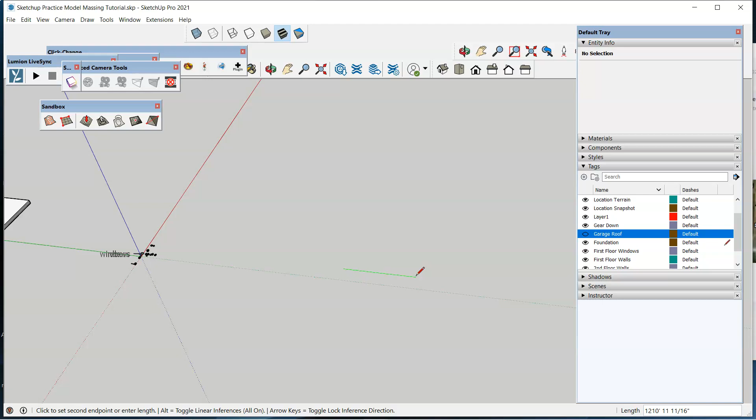So let me go ahead and introduce the commands for SketchUp. The letter L draws a line, and you'll notice that the lines change different colors. Look at the axes right here. The green and red lines are basically like the Cartesian coordinates, your X and Y axis, and your blue lines are your Z axis - they represent your three-dimensional axis.

So right now I'm drawing the two-dimensional geometry. I pressed the letter L, clicked anywhere, and it dropped an anchor of a line, and I want to make sure that I draw straight lines, and I want them perpendicular. So I want to make sure that I see green or red, and when I see green, I know I can draw a perpendicular line from it on the red axis.

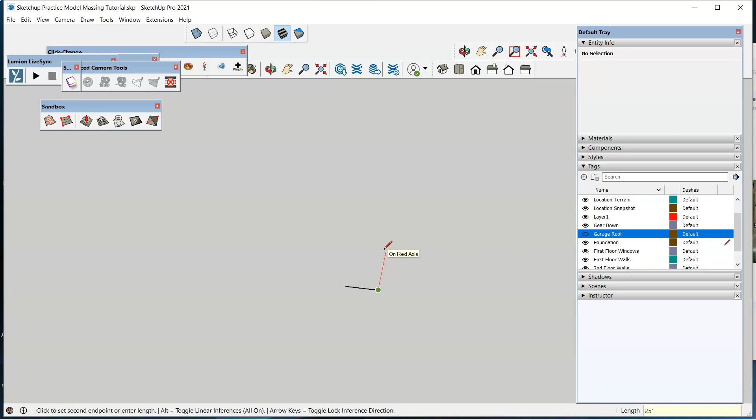So I'm going to go ahead and type in 25 feet, and again on the red axis 25 feet. Now we're looking at this from a perspective, so it's not going to look straight, but it is.

Now you'll notice that there's these little dots - SketchUp's trying to help you draft. If you hit the space bar, you get out of that command. Notice how when I closed the geometry, this solid piece came through, and that means it's ready for three-dimensional extrusion.

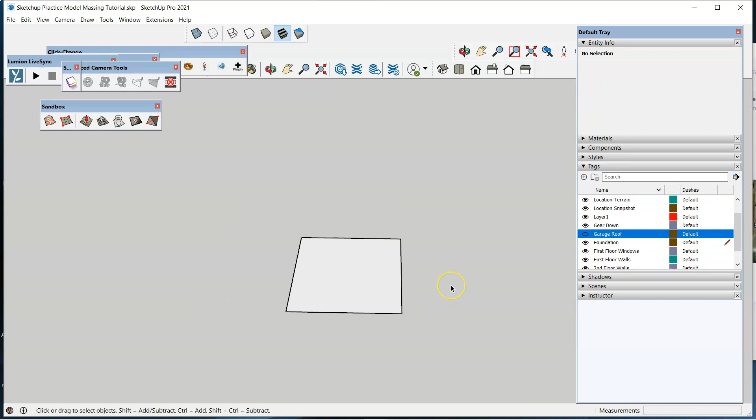So what I can do is hit the letter P, and this is the push-pull command for three-dimensional extrusion. I can type the distance however high I want, and I'm just going to do 9 feet. I literally typed in the distance 9 feet.

I also typed in the distance from the line command, 25, and I used that little symbol - the apostrophe. There we go. The apostrophe denotes feet, and the quotation symbol is inches. That's pretty standard in a lot of CAD programs, computer-aided design programs.

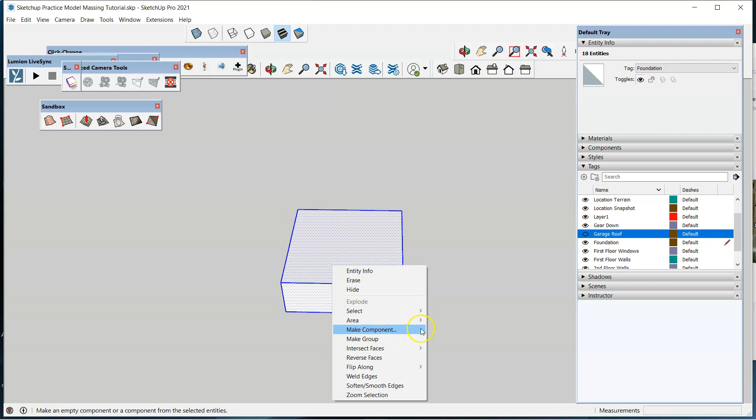Okay, so this is a massing of the actual garage - this is what's existing. There's also supposed to be a roof on it, but we're adding a second story. In SketchUp, you are able to manipulate this, but I don't want to because it's a massing, and I want to put something on top of it and play with it while not disturbing the original geometry of the first floor.

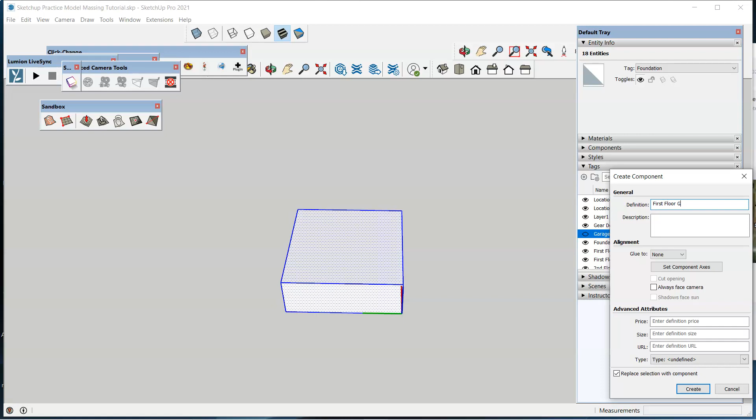So I want to make this a component. Hit the space bar, left click and drag, and you'll be able to select all of this geometry, right click and select make a component, and just call this first floor garage, then hit create. Notice how it selects all the lines.

Now I can explode this and undo it, and now it selects everything individually. So I'm going to go ahead and undo what I just did - undo is Control Z, Command Z for Mac. This is basically like a force field around it, so I can't really mess with it.

But I can manipulate it if I double click on it. Notice how this force field around it is highlighted in this dashed box, but now it's all individual lines.

Anyway, so that's components. Now for this massing project, what I would like for students to do is go ahead and take the dimensions 25 by 25.

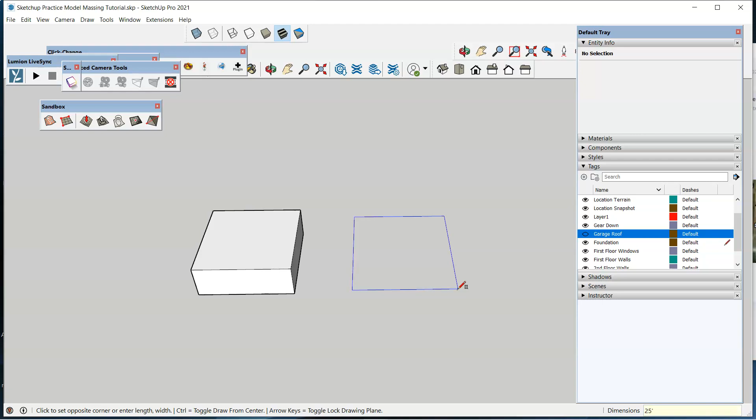You can type in R for the rectangle tool. Let me back up. R is the letter for the rectangle tool, then you select this point and another point for a rectangle. Let me show you over here. I left click here, then left click over here. I can type in 25 apostrophe, comma, 25 apostrophe, enter, and it'll make a rectangle with that.

So what I want you to do with this massing is come up with basically how you want it shaped, but I want 3 different iterations.

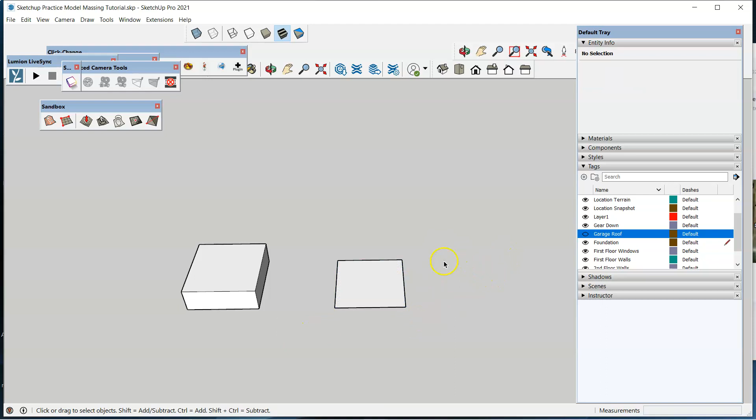I'm going to go ahead and move this. How you move is select all - hit the space bar to get out of every command, then select by left clicking and dragging the box over, hit the letter M, and then you can move.

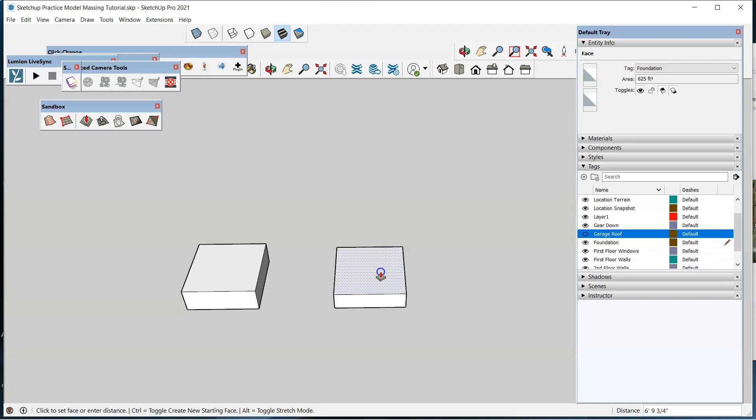The ideal way to create a massing is push-pull. Since this is a second story, you can do this 9 feet or 10 feet - it really depends on what you want on the inside. I want 9 feet on the inside, so I'm going to do 9 feet.

But look what else you can do. I can draw a line, let's just say, to this. Notice how it snaps to these various points and calls it out - midpoint. That's the very middle of that particular line. I can draw a line from midpoint to midpoint.

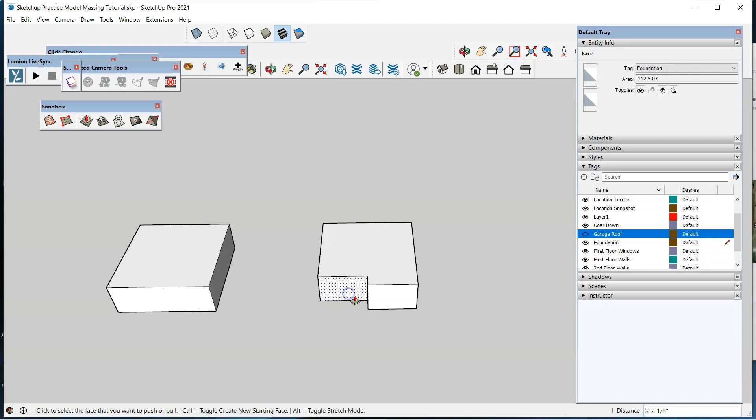I can also use the push-pull tool and make this more interesting. I could also choose a random, arbitrary shape - maybe this could be a balcony, maybe this could be another balcony.

What I don't want is this shape to repeat. So you can really play with a lot of things - maybe this is the office here, and...

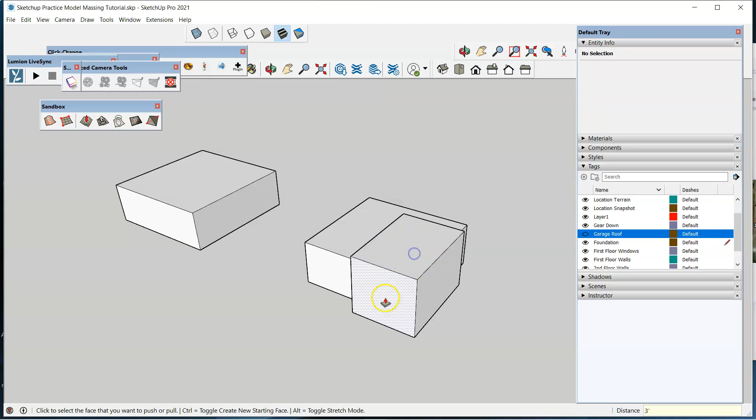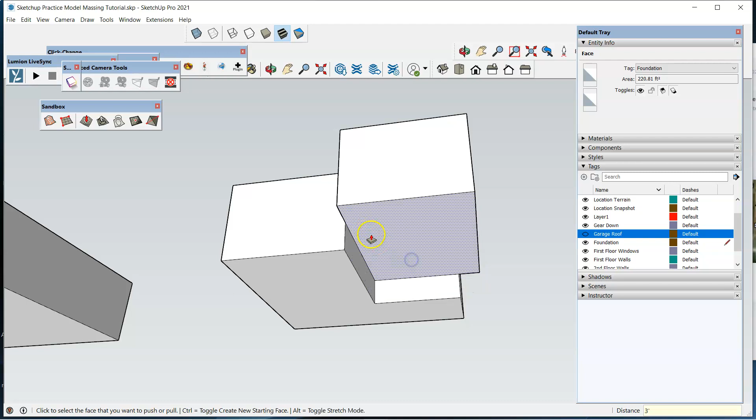Maybe this goes up another 3 feet. I typed in 36 for 3 feet. And maybe on the inside it also goes up 3 feet, and that way you step up into this separate space.

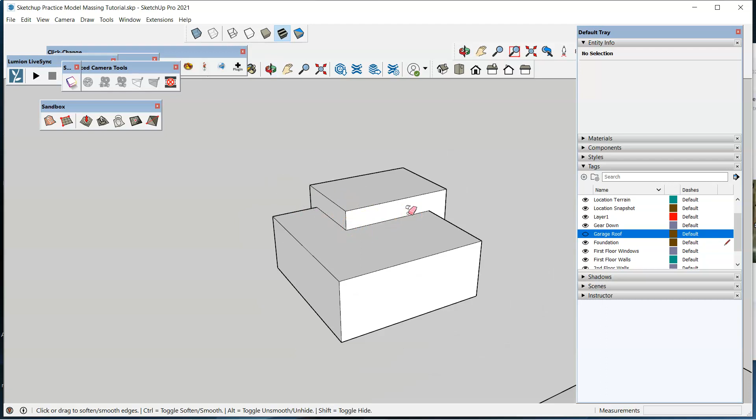But this space is empty, so I don't know if I like that idea, but you get the idea - you're creating these masses to get a feel for it. I'm using the erase tool, the letter E for erase, and I can just select lines I want to erase. I don't know if I like that idea, so I'm just going to Control Z.

But maybe I like this - create this whole kind of separate vibe from this area. Maybe this area is a lobby. Maybe this area is, I don't know, a little kitchenette.

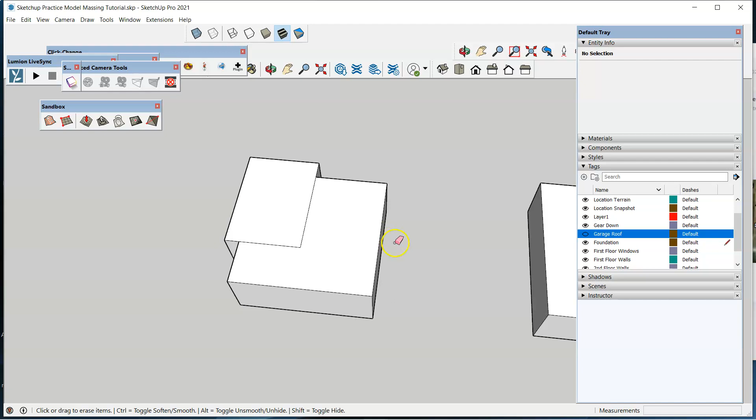Or maybe this area is a kitchenette, this area is a lobby, and this area is for clients to discuss their projects, and then this right here is for maybe a TV screen to project their project. But play with it, definitely play with it.

I would actually do this - I would do the rectangle before I would start doing the push-pull tool. I would make the rectangle, and then I would make copies.

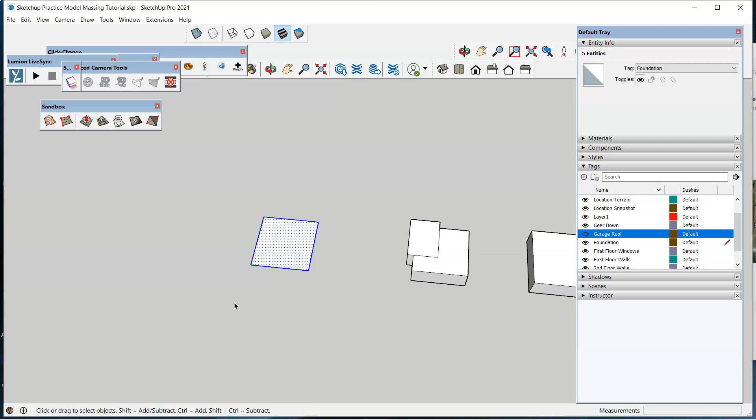So I would hit the space bar, select, move, hit Control, and then click right there, type in 5x, and it makes copies. That way you can just fiddle around with all different types of iterations of this design. So this could be 1, and once you're done with 1, make it a component.

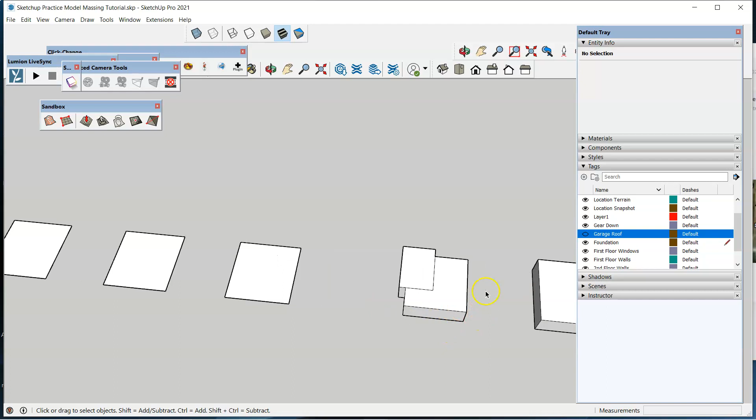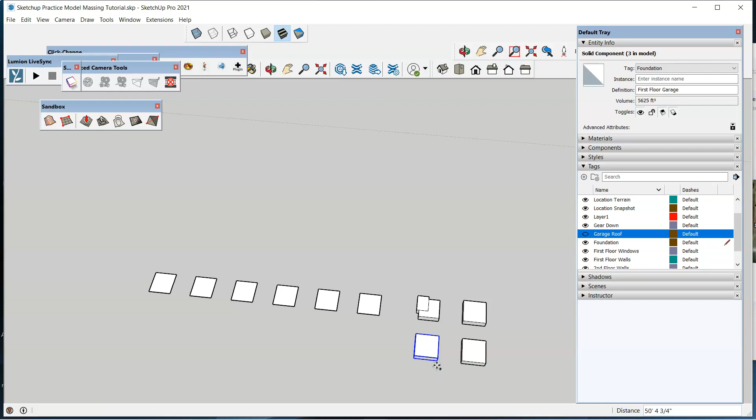And that could just be massing 1. If you want, what I would recommend is copy this too - hit the space bar, move, Control, M for the letter move, hit Control. Then I would do that again and click right here, let's just hit 6x. There we go.

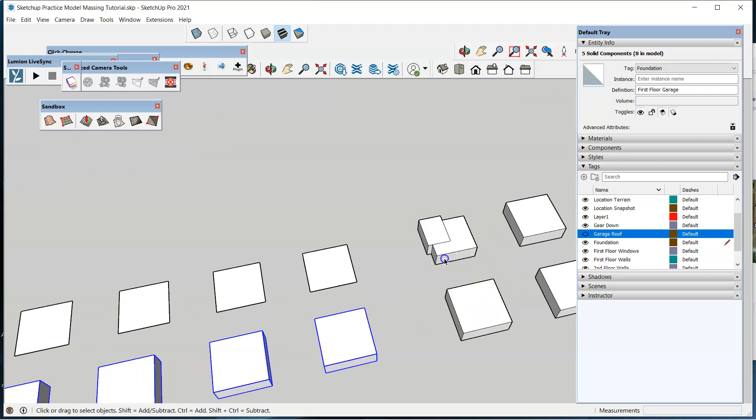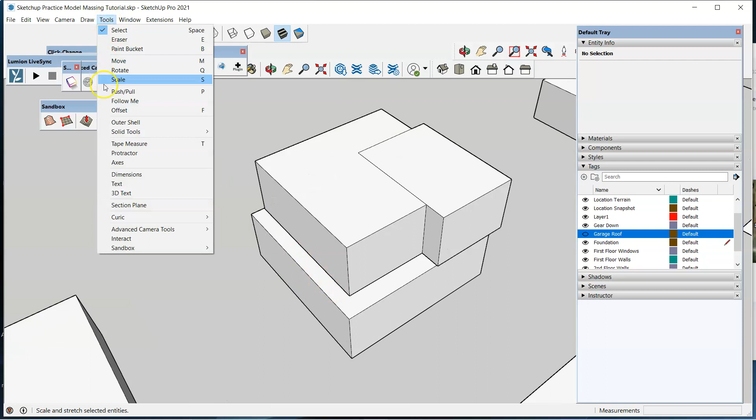Move and get organized, so you can stack your designs. I would always do copies—leave the original here, then stack it and see what it looks like. Maybe this could work, and you can see how this could wrap around as a balcony. But you can also go to Tools and check out the tape measure.

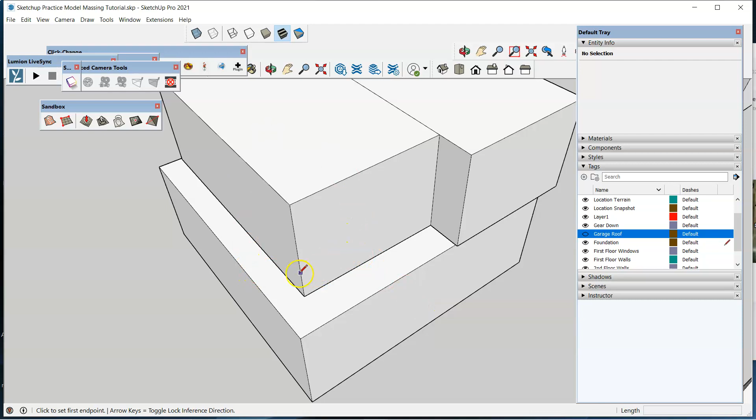You want at least... 2 feet's not enough, so you might want a little bit more. Or you might not, I don't know. We could do a little roof that goes off of here, that juts off of this area down this way, so it'll look interesting. So maybe that's what I want. Or...

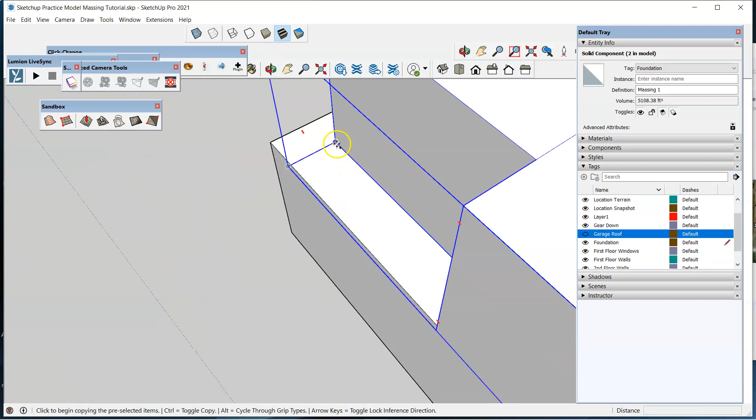I'll select this, move, copy, and maybe I don't want it there. I want it here, where this is hanging off, or move it. I think that's what I originally did. Yeah.

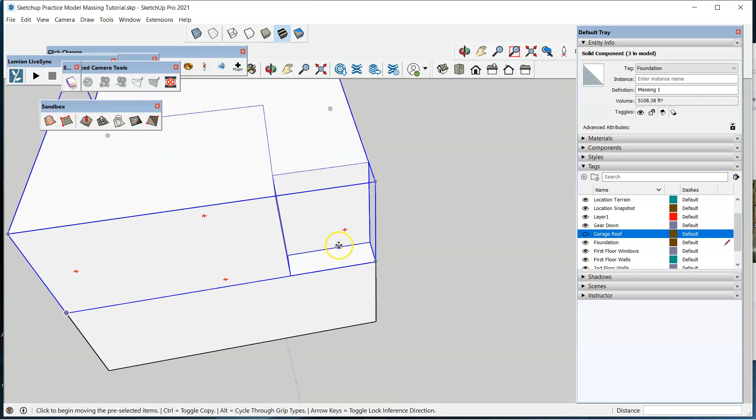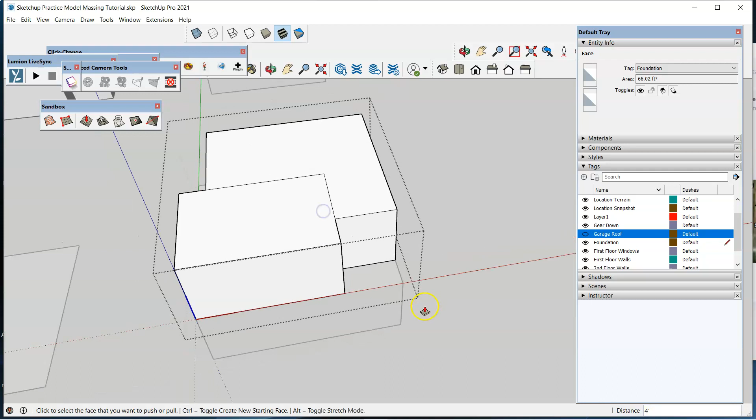So you should probably have at least 4 feet. You can go to Tools and Tape Measure, or press the letter T for Tape Measure. And yeah, that's not 4 feet. So you can double click inside, push pull, and go to this very edge, then just type in 48 for 4 feet. Do the same over here on face—that'll bring this face onto this, match it right up, 48 for 4 feet, and that'll be proper spacing for that.

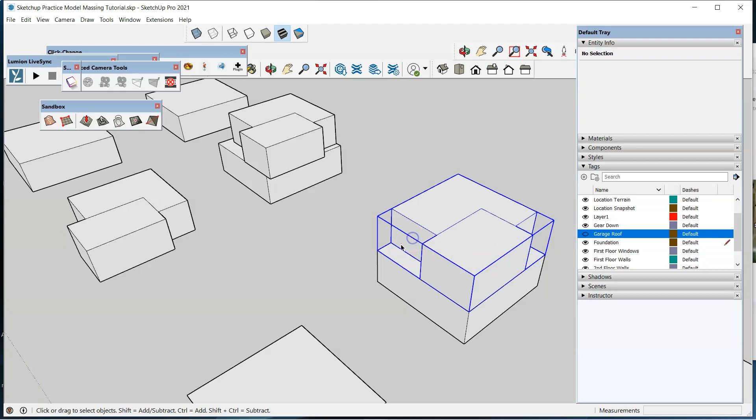Or maybe you just want this little balcony for yourself—you don't necessarily want one for a client. Pull that over here. Oh, you know what? Let's make a copy.

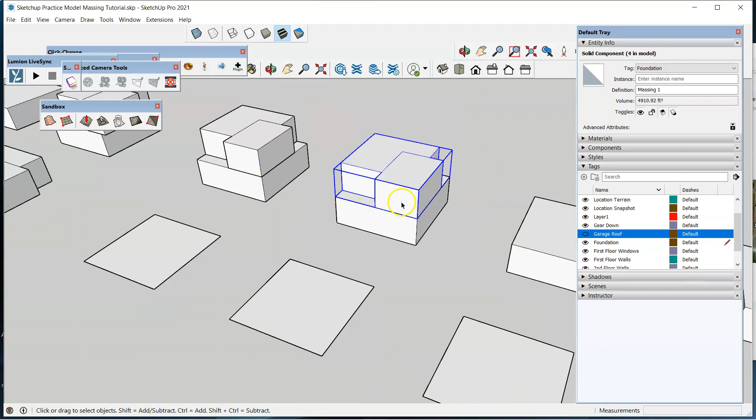And you can see how SketchUp is used to develop. So move—there we go. Double click inside, push pull, and then I could match this edge, so I just left click and hold, and there we go. Double click out of it, and there you go. So I have this whole balcony for this office.

Or maybe I could make it for the client as well, or everybody in this space. It really depends—I do like this idea of overhang.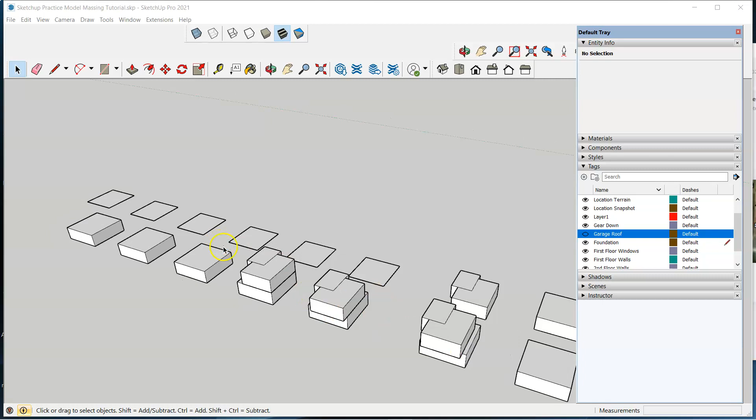So play with it, see what you can come up with. I would definitely do different designs—I was just doing this real quick to toy with it. So maybe play with something like that.

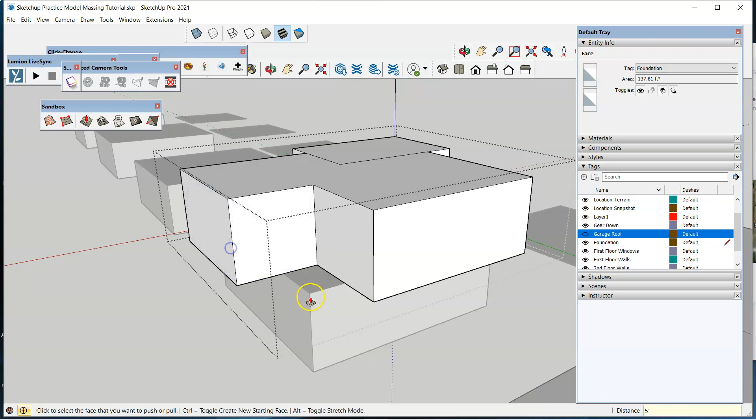Really go far-fetched and try to go a little further than what you expect. Maybe you really like these overhangs—go 5 feet, let's try that again. I left click hold, type in 5 apostrophe, spacebar, or enter, and then you've got this really wild thing going, and you got a lot more space.

You also got to remember on spacebar, double click out of it—you have to have a landing for a way to get up here. There's no elevators, so consider that in your design. You need to have some sort of way to get up here. It's going to be stairs. Spoiler alert. All right, yeah.

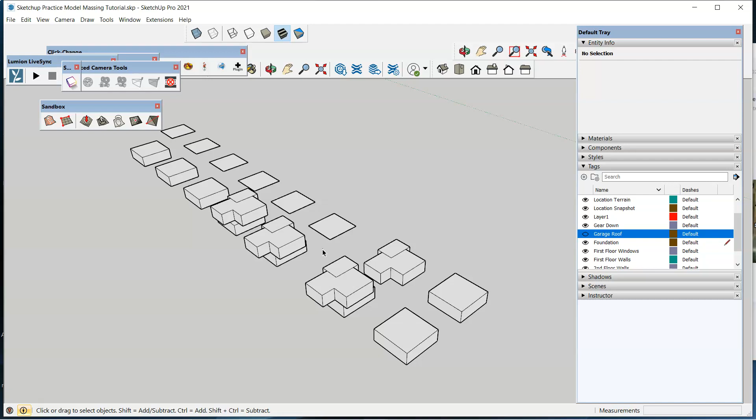So definitely come up with more iterations—the more you have, the better. The more you play with it, the better. Don't spend 5 minutes on this and turn it in. Really consider what would go well on this site, and really consider the different spaces in here. You've already read the case studies on what works in different offices.

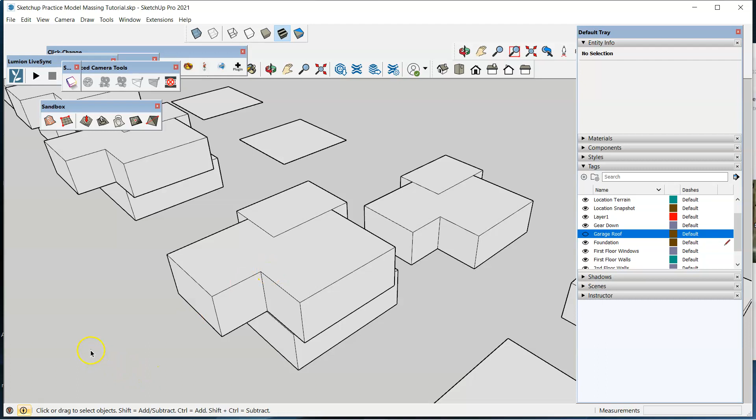Identify what you want in your office, what you need in your office. You'll definitely need some storage, and some space for a wide format printer. You'll definitely need your own particular office, maybe a kitchenette, a bathroom of some sort. Or this is going to be your home office, so I don't know if you're going to want to go downstairs into the main home to use the restroom or grab a bite to eat. Really take those things into consideration—you're going to be in here working probably 8 to 12 hours, so really take those things into consideration.